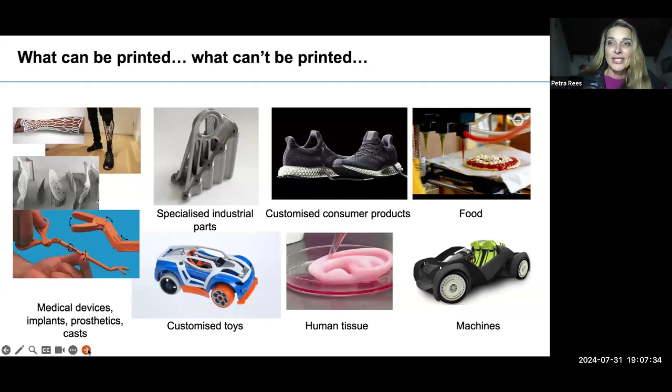So welcome to the world of 3D printing. It's really one of those things where anything you can imagine can be made - almost everything these days. You obviously need different types of technologies, and they're at different stages, but I'm going to get into it. It's really sky's the limit, that's what I'm trying to say with this.

Just a brief overview of the journey of 3D printing - I want to make sure this is all covered. I wanted to paint the picture of where we are with 3D printing and where we're going with it. It's actually a fairly old technology, speaking in terms of technologies - it really started in the early 80s, but it was patented for 20 years.

That's why we only really saw a lot of progress in the 2000s, once the IP was released in the 90s and then scaled. That's why you see a lot of things starting to happen around that time with prosthetics and prototypes - that's where it's still very prevalent.

We had the first 3D printed cars and houses in 2014. You probably remember this guy - since I've heard you also can speak to International Space Station people, I hope they're doing well now, stuck up there. But essentially, if you can see what he's holding, it's a wrench - they actually 3D printed a wrench. If you think about it, that's a decade ago, so it's a long time ago, yet it feels like we just heard about it the other day.

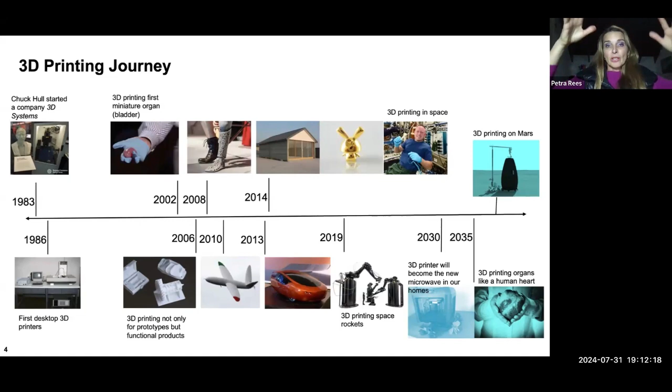It's going to be here before we know it. If you follow a little bit about the medical fraternity and what's happening there, it's just incredible progress every year. The pharmaceutical industry is already using 3D printing quite extensively. But yeah, we're still far away from having a 3D printer on your kitchen counter printing organs, though we are going to get there in our lifetimes for sure.

So that's just a bit of history. In terms of where the industry is at, I'd like to touch on that just to understand it a bit better.

You obviously know this guy called Gordon Moore. Back in the day he was talking about integrated circuits, and how every 18 months the technology, when it comes to scaling, doubles. So what we're trying to say here is that it is impossible to predict the future, but it is possible to understand the fundamentals.

Thinking about Moore's Law, we can actually translate it into an industry we all know really well, which is the music industry. If you think about where it started back in the day with a gramophone, and how it's progressed, it took a slower move until the 80s and 90s, and with MP3 music, it just changed our lives completely.

What you can see is really the exponential curve of what actually happened with this technology. Typically, if you look at any technology, it goes through this kind of curve, but it also goes through what we call the valley of despair. And that's a little bit where 3D printing also encountered itself to be in—I'll show you what I mean by that.

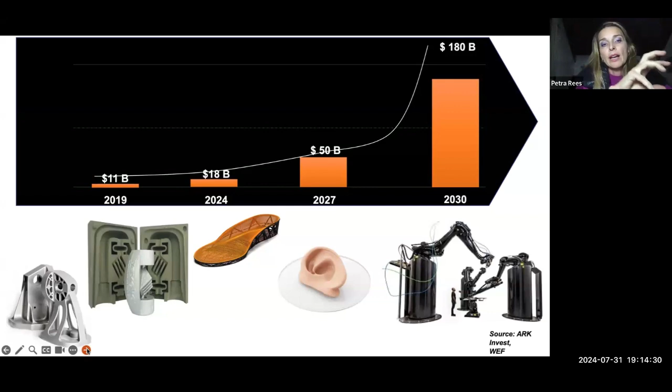When it comes to revenue and the markets, where we are at the moment and where we're going—today we're looking at this industry being $18 billion in terms of revenue. It's mainly moved from prototyping and making molds, very much in that engineering prototyping space, into end user products. That's really where it's taken a huge ride forward over the last years, because of that end user product focus and other industries I already mentioned, like space technology and robotics.

We can't think robotics without 3D printing. They are 3D printing a rocket to get to Mars so that it can 3D print a rocket to get back to Earth. So that's essentially what's happening.

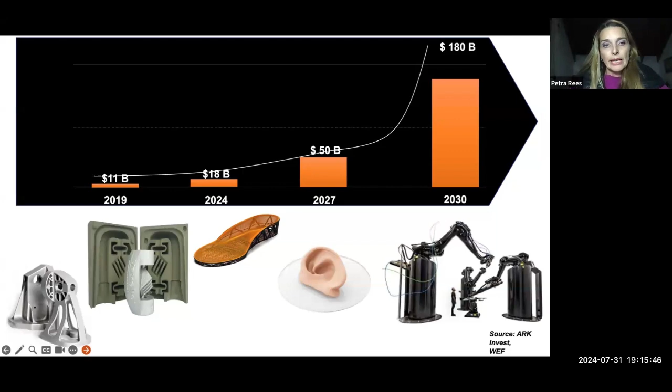We're predicting that by 2030, the industry should reach about $180 billion in revenue. So in the next six years, it's growing about 40% year on year, and we can already see the big jumps happening. That exponential curve I was alluding to in my previous slide—you can see the industry is following it as well. It's in its early stages but going to shoot up fairly quickly because of all these other elements happening, which I'll add to a bit more with these drivers in this slide.

So essentially, we have the technology drivers and the demand drivers. In terms of technology, we have to think about 3 things when it comes to 3D printing: the printers and the technology itself, the AI and software, the design, and the materials.

And the drivers in terms of what's driving these technology aspects is really time to market. Everybody is expecting things to happen really quickly these days. Think about molds, where before we needed casts and a really difficult way to CNC machine certain parts, and now you can 3D print them in a much faster time.

It's a game changer. Hyper customization is massive in a lot of industries, but mainly the automotive industry, with small batch manufacturing, organic manufacturing, and superior performance products. It links a lot to the automotive space. We can also see it in other industries like clothing and shoes. Everybody wants customization to fit their own bodies.

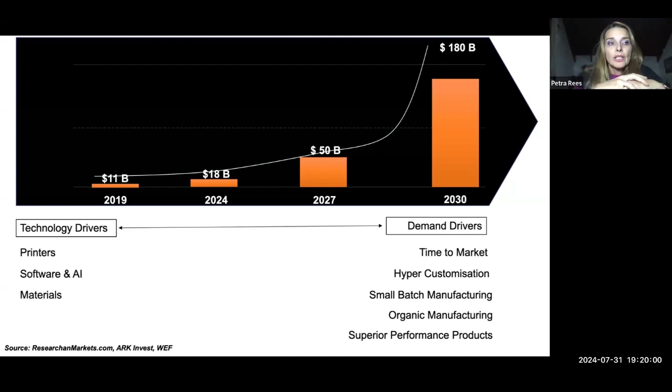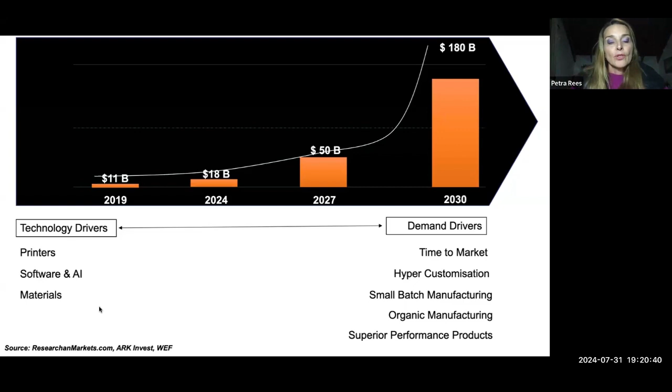Tesla does it all the time - they remove something like sometimes 10, sometimes even 100 pieces, and turn it into one, because they were able to design with the help of AI, taking into consideration materials and material science together with AI computing what's possible in the design world. You get incredible new organic designs that were never possible before. And you can't machine them, by the way - you can only 3D print it. So this is actually going to go even further.

I wanted to touch on why we haven't seen perhaps faster growth in this industry - this is typically what happens with a technology in its early stages. My prediction is that we're going to see the same with AI: you have a huge hype curve going up, everybody is crazy about this technology, everybody says it's going to change the world. Then you start seeing what we call the trough of disillusionment, where people say, you know what, it's not really what we had in mind - for all different reasons, because the technology isn't at the level people were hoping for.

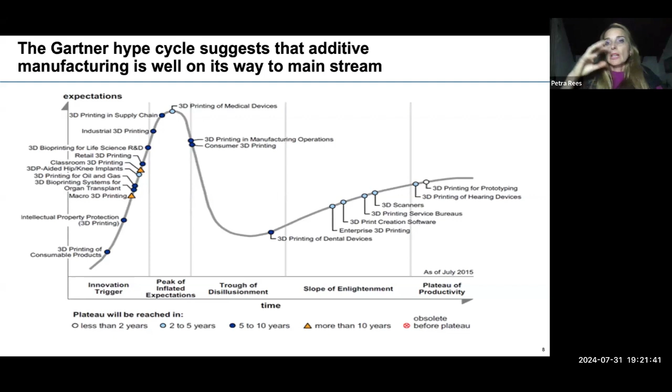Because obviously technology needs to evolve. You need different components, you get better components, better raw materials, etc. And then once you get through that dip, if I put it this way, you can start actually seeing the growth again. And that's really the exponential growth.

So what we've seen in 3D printing is that from the 2000s up until about 2014-15, it was going like this. Then we saw this dip. And now it's picking up again, thanks to COVID - I can actually say positively this time, because people realized the disruption in supply chains and invested more into this technology, and now it's actually scaling up again. You'll probably see the same happen with AI.

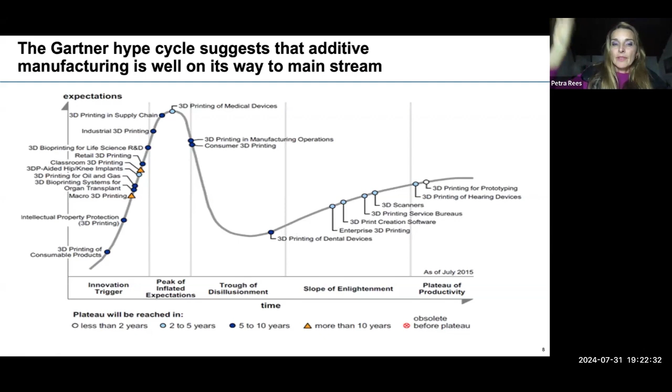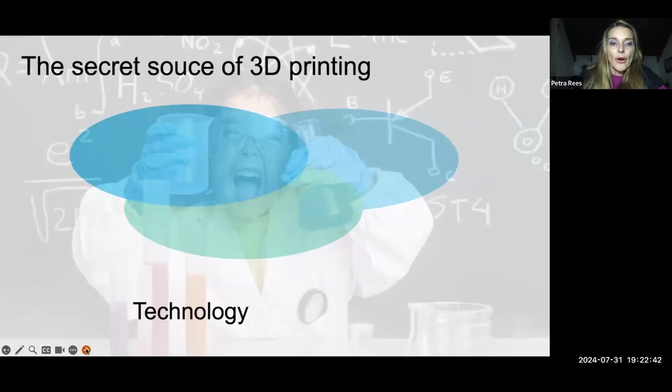So there will be that dip, everybody invests now, and then we will see that growth again, just FYI if anybody's interested. So I've already mentioned there's a prediction that by 2030 there should be a 3D printer in every home. The secret sauce is really about these three components: technology, materials, and design. They all go hand in hand, and one needs to understand all three to get the best out of 3D printing.

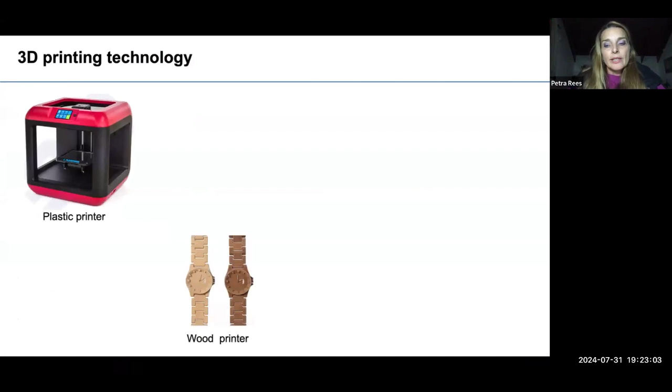The type of technology you probably came across - I call it the one that makes it easier for everyone - is a printer that prints plastic that you've probably seen before. It's FDM, fusion deposition modeling type of 3D printing. Then there's typically carbon fiber printers that some of you might have come across. The lucky ones are titanium printers, platinum printers - these are really in the labs of some of the big universities, as you can imagine, and CSIR. There's also a porcelain printer, wood printer, construction printer. I mean, that's just a taste of what's there. I just wanted to demonstrate the vast opportunities and industries where 3D printing is already happening.

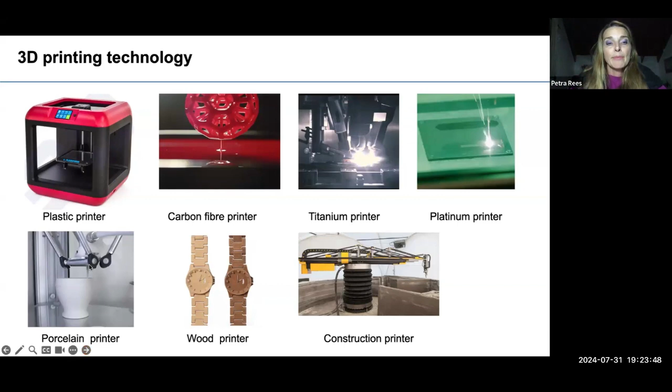The most popular technology for people like yourselves is really in the FDM space, as I mentioned, the fusion deposition modeling, which is that melting and creating those layers. Most popular printers for schools and homes - probably some of you may already have one.

The other type of printer is stereolithography, which is also very popular. What it does is use a UV laser beam to harden the resin to get the shape, also in layers. I'm going to unpack which ones to look at and start with.

The third most popular one that you should pay attention to is laser sintering. There's obviously others - much more in terms of 3D printing that's available - but for your interest and the space you're in, I'd suggest focusing your time on those printers because firstly, they're accessible. I doubt that somebody would just quickly tonight jump on a 10 million rand opportunity to get a 3D printer. So I'm just getting to the ones that I believe you should keep an eye on.

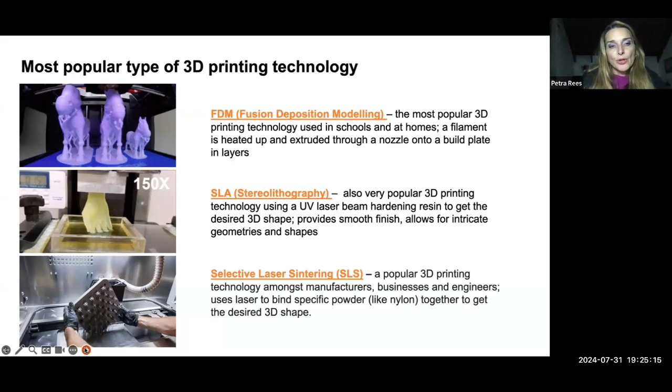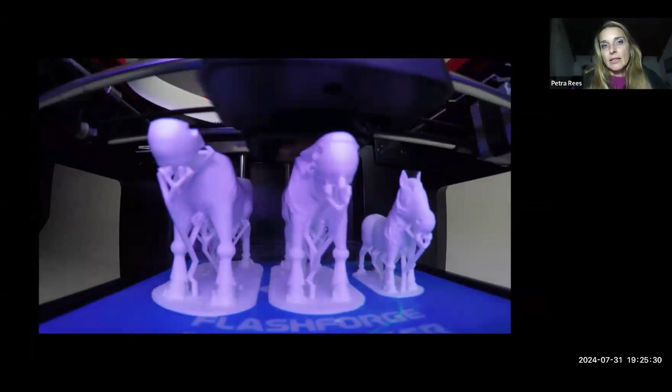And I'm going to also show - so this is the FDM printer. You can see this is obviously sped up, and you can see the layers being created by this printer. So this is your classic FDM printer.

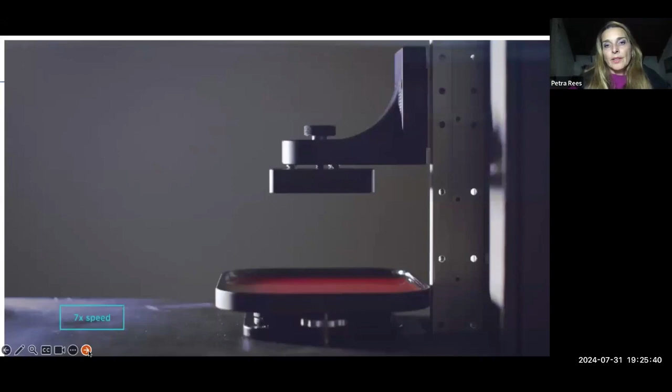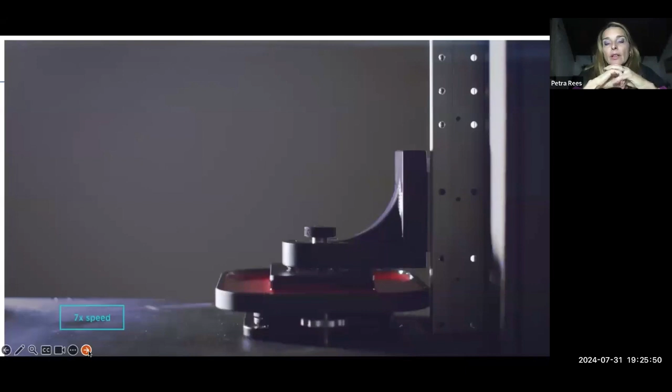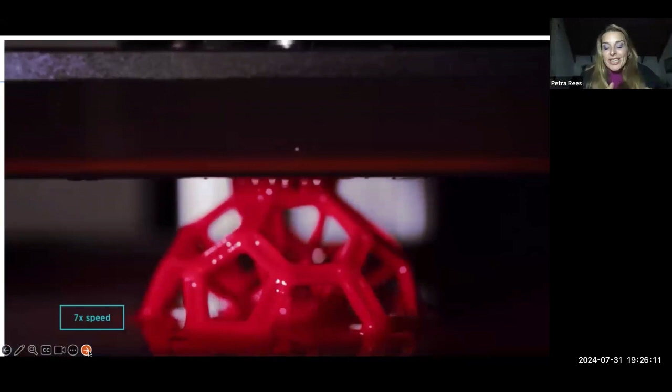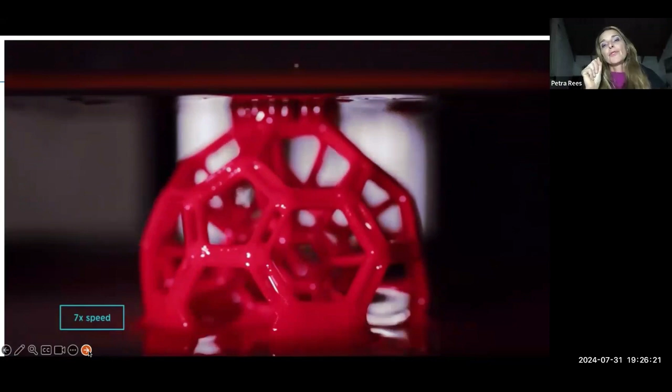This is your stereolithography. As I mentioned, that's the resin that is hardened by using UV light as well. So what happens is it creates those layers. It's a little bit harder to work with, just because I personally had one - I sold it because I wasn't necessarily the person who enjoyed the chemical reactions and the curing stations, and I ran out of patience, I'll be honest with you. My focus was not necessarily to have the absolutely perfect detail. This type of printing is brilliant, and you can see the quality and detail that you can get.

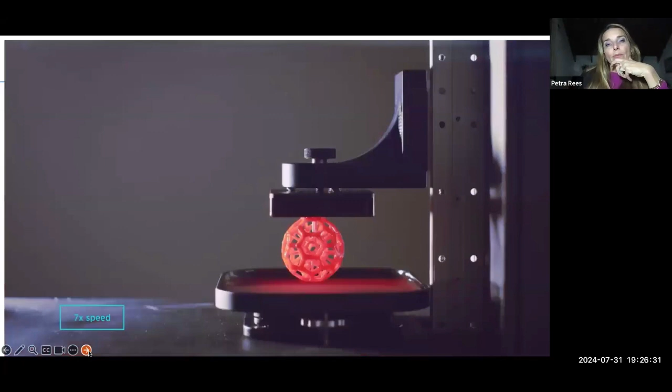Printers start from about 5,000 to 10,000 rand onwards, depending on the brand. So they are very accessible. By the way, the FDM printer - I have some more slides on that - you can get into it for 4,000 rand, but I'm going to get to it a little bit later.

This is... I don't know if you can hear, but even if you don't, that's fine.

So the first step of our additive manufacturing process is 3D design. Our designer will either create a new design from scratch or take an existing design and improve it, adding features that take advantage of 3D printing.

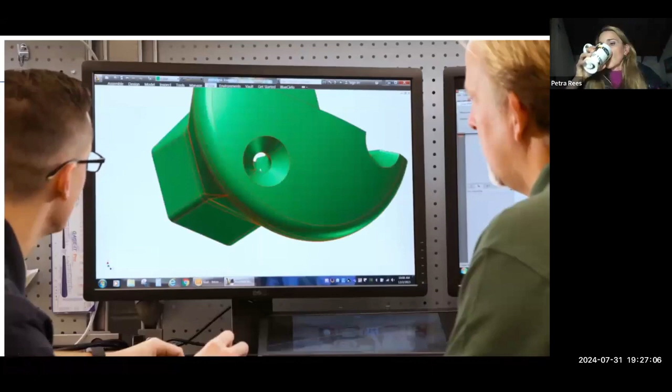We now have the capability of modeling our processes, so we can take these virtual designs and simulate our process in the computer to verify the designs will work as intended. Once we validate our 3D design, we start by printing it in plastic, a relatively quick and inexpensive process that gives us an actual 3D part versus a virtual design.

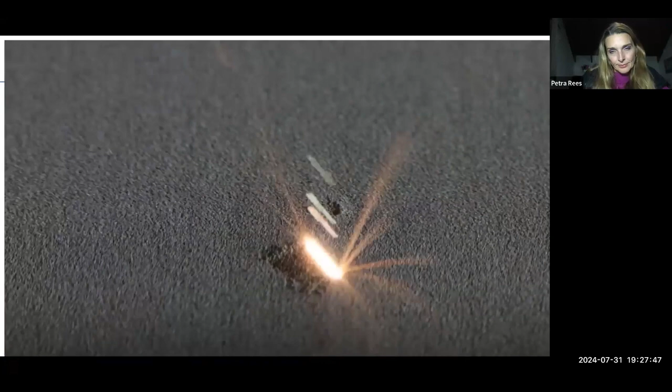We're in our additive manufacturing lab in Indianapolis, Indiana, next door to our powder facility where we make the atomized powders used in 3D printing. This printer has a 400-watt laser. A doctor blade carries the powder across the build plate, and the laser then selectively melts or sinters the particles together to form a solid part, building layer by layer.

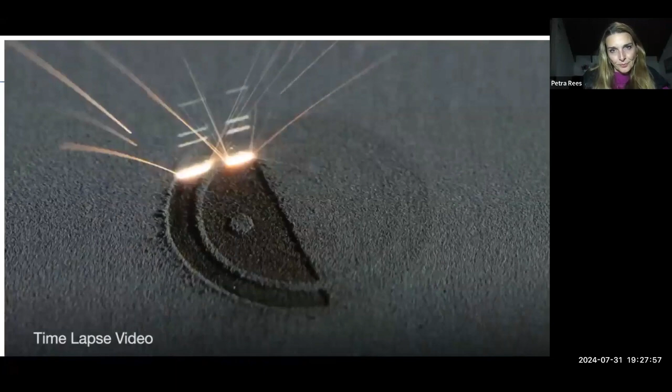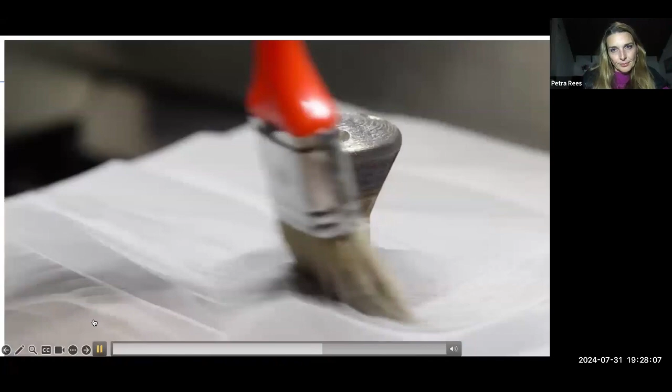A key advantage of additive manufacturing is the reduction in raw materials needed to process a part, because only the powder needed for the design is used. The remaining powder is captured, and working with our powder facility, we can recertify these powders as needed for different industries.

Once we have printed a part, either in plastic or more importantly in metal, we can scan the part and measure the dimensions to validate that we've met the criteria of our design. Additive manufacturing allows for complex parts that cannot be manufactured by traditional machining. This allows our customers to be very innovative, creating designs that weren't possible in the past, leading to improvements in efficiency, cost, and performance.

So if you're progressing on your 3D printing journey, this is something one would love to get to, where you can use laser sintering with metal powders. It is fairly expensive to get into, but the printers are getting cheaper and cheaper. The last time I looked at a relatively capable 3D printer like that, it was a few million rand, but as I mentioned, it's getting cheaper.

But what's important is that you can start getting samples like this - for example, this is a miniature of a manifold. As discussed in the video, you can start seeing how those parts would look, printing prototypes and studying them to see whether they have the relevant shapes and properties you require before investing in having it printed.

There are several 3D printing houses in South Africa. One of them, for example, is Mentors, which you might have come across before, where you can get parts printed on demand. They have a great nylon facility and great HP 3D printing machines, where you can get amazing parts printed in nylon that really last and have great properties. So it's one of those things where you don't necessarily need to own an expensive machine - you can still get it 3D printed with the right technology.

But I think the key is how do we get into 3D printing and use it in such a way that it can help you in your process in terms of what you want to achieve.

When it comes to materials, I'm going to stay in the realm of FDM, fused deposition modeling, the plastic printer you've seen earlier. I think it's one of the best printers to start with - suitable for what you want to do in the amateur radio space, because it gives you an opportunity to print some of the items you need without necessarily investing heavily in more complex machines. So I'm going to spend a bit of time on the materials you want to be working with when you have a 3D printer.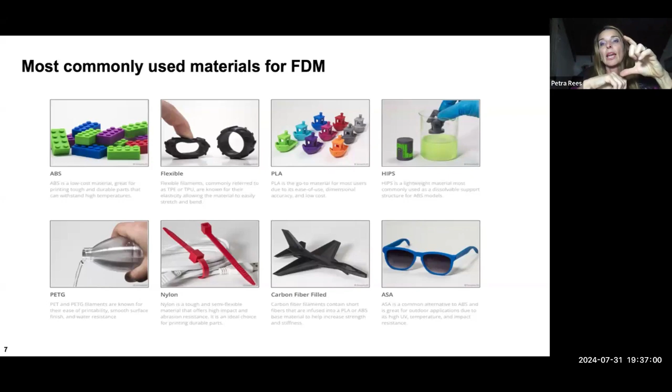And then there are others. The one I'd like to touch on is HIPS - it's really about dissolving. Let's say you print a part in ABS and other parts in HIPS, for example supports, then you put your component in the right liquid and it dissolves. The HIPS would then dissolve, and you have a perfect end product without machining it or spending a lot of time in post-production. That's another element you should be aware of if you want to print more complex parts.

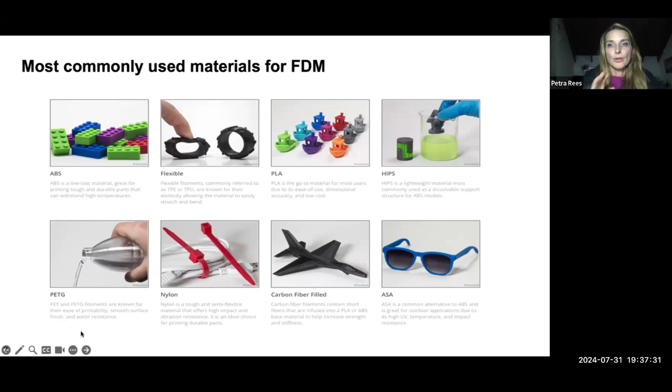So that's what I wanted to say about why complex parts matter. If you're looking at metal, or even trying to machine it, as I mentioned earlier, if you want to use ABS together with HIPS, you can start getting into an interesting area when it comes to design.

So whether you're using titanium parts and so forth, it can only be done through 3D printing and using the right software with it. That's why it's such an exciting space in the automotive industry.

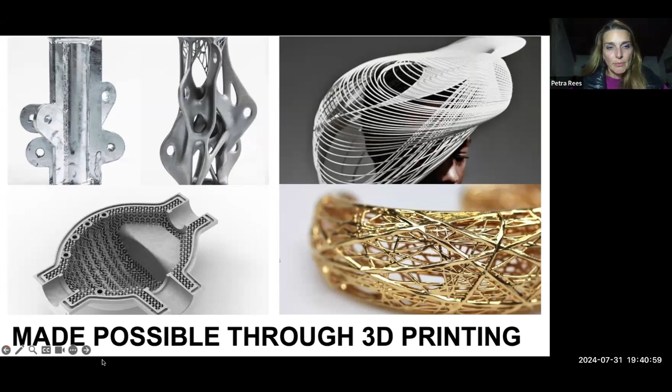When we talk about 3D printing in general, we also touch on different spaces. School is another area where you'll find 3D printing being used a lot, in robotics.

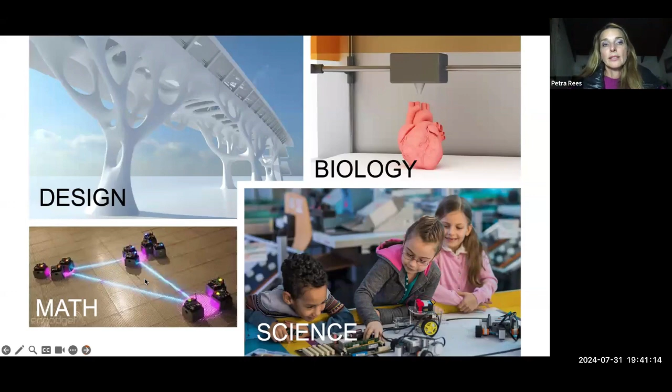As I mentioned, design, architecture - that space is growing like crazy because of construction and 3D printing in construction.

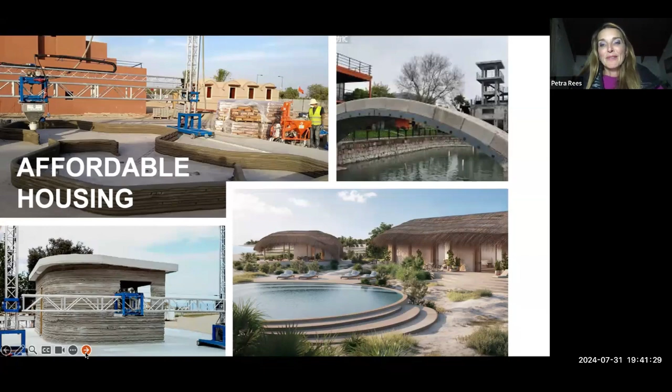I just wanted to touch on this because there's a lot of interest - often these questions are asked about how 3D printing in construction is going. So if you don't mind, I'll entertain you a bit on that.

I've chosen a few companies, the top 3 companies in the US and really in the world, and then one company that does 3D printing in Africa called 14 Trees.

What's interesting about them - these are the pictures 1, 2, 3. This first one, the house on top, is a 3D printed house by Icon.

This second one is the tallest Guinness Book record 3D printed house. It's actually an office, a municipality office in Dubai.

It's a 2-story building done by Apis Cor. And then you have SQ4D.

They're also one of the first to 3D print houses for sale with certified occupancy. The ones mainly in East Africa, Kenya, Malawi, are done by 14 Trees.

This is one of the examples of schools, as you can imagine, which is going to change mainly the local housing space.

There's a lot of debate about why we don't see more 3D printing in construction in South Africa. I'm not going to get into that, but there's a lot that goes with it, whether it's certification or time to market.

Things take time. People prefer different things. Awareness and education to move people away from the brick and mortar they know to a different type of material takes time.

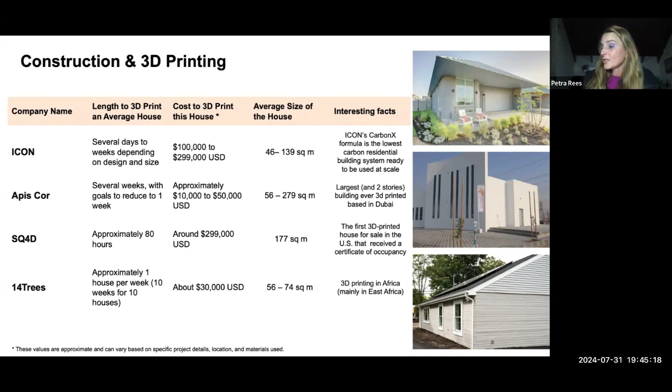From what I understand, in Dubai they want, by 2030, to have 25% of their houses 3D printed. Dubai's situation is slightly different because they're struggling with labor - it's hot in these spaces, so you really can't have people in 50 to 70 degrees Celsius too much on the construction side. So it's a big move in this space, especially in the Middle East.

Local supply chain - I already touched on this, it's again a big opportunity in that space. As I mentioned, you can repurpose things and get things to last longer. We had a great example of some items, like impellers, that lasted way longer than the original part. We were actually laughing with one of our engineering partners when the client was saying, 'you guys need to make it in such a way that it actually breaks, otherwise you will never make money.' So we were really having a good laugh.

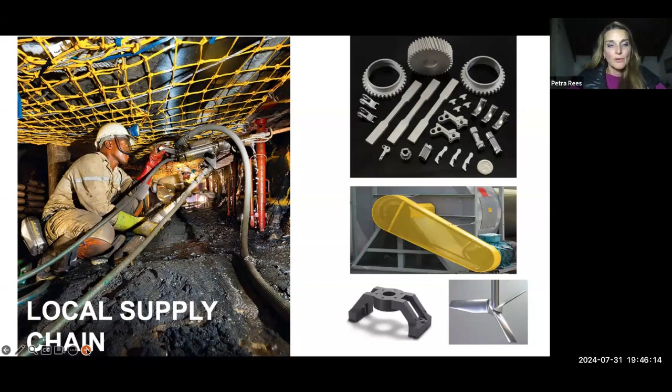In terms of time, I don't want to get into every little detail, but local innovation is just a touch on this. You'd know this kind of tractor that you might have seen, not just in South Africa but anywhere in Africa - you can repurpose things. What I'm trying to say is, thanks to 3D printing, you can get these machines to push their lifespan and go a little bit longer.

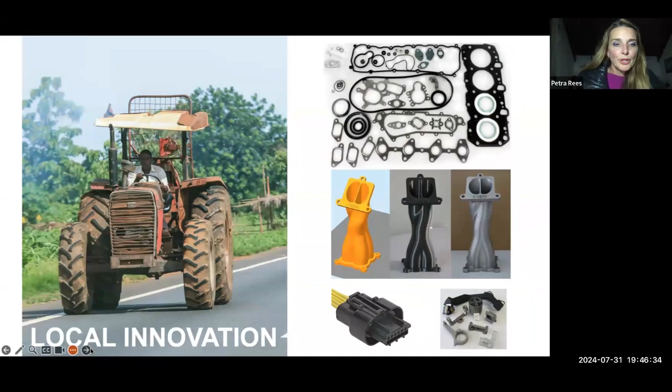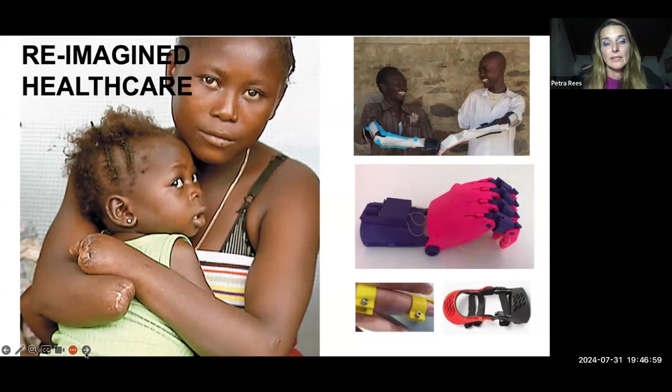Healthcare is massive, they're already 3D printing - obviously upper arm prosthetics. We 3D printed on our small printer, one just for the school environment, this hand. From a cost point of view, it was 200 Rand, and it took a day and a half. So what's happening in this space is, again, we're at the precipice of what's possible.

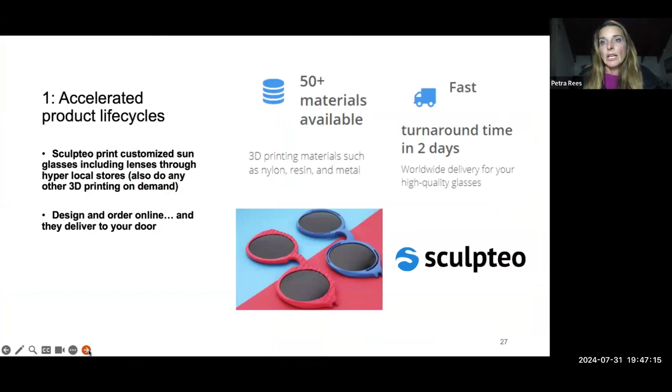Just the five big disruptors, I'm going to touch on them quickly. So it's accelerated product life cycles - as I mentioned, people want things tomorrow, so you can decrease the turnaround time. You can get new manufacturing strategies and footprint.

This is, for example, one of the 3D printed cars. I imagine you can have a model that can be 3D printed anywhere - you can design it in Johannesburg or anywhere else in South Africa, and then somebody in Malawi can 3D print it, having the machine.

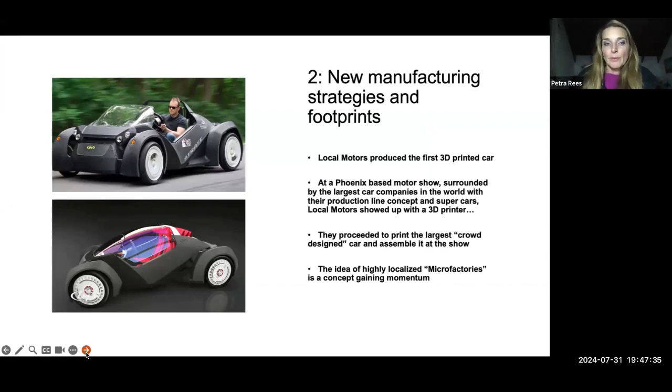Shifting sources of profits - this is the shoes we're talking about. Adidas, for example, the customized ones - when they started, they had 5,000 shoes, which is commercially not possible to make through traditional manufacturing in order to make any money, with the right molds and all of these things. But with 3D printing, you can. That has its limitation at the same time, because the units are much smaller, on a much smaller scale, but that's why the customization actually works as well.

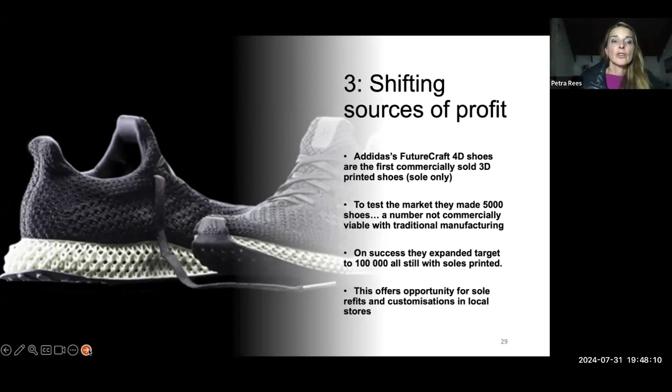So it's an upside and a downside. New capabilities I already mentioned, for example, medical space, latest design.

CAT wants to 3D print 10% of their parts by 2025. I think they're a little bit further than that. It's happening in the basements in America, but I think there's a lot for that.

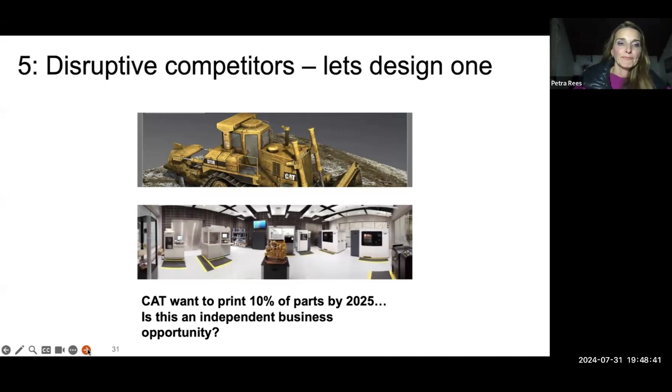So this is where I'd like to get a little bit more practical. I pulled out a few images that probably look familiar to you. Some of them I didn't know what they were, I won't lie. But I know you would probably smile when you see them.

These are all free models available online today that you can 3D print if you have a printer. There are some others, these are different knobs. I think I 3D printed this one, can't remember which one it was.

Casings, all of these things you can think about. A lot of these are free. There are some that might be at a cost, but as you can see, 12 Rand, if you really want that specific knob, it's not bad.

So it's really the cost of design that's expensive, but because of people like you who are enthusiastic about stuff and want to share, a lot of people design things and put them online, and you'll typically find them on things like Thingiverse and MyMiniFactory, where all these designs are already for free.

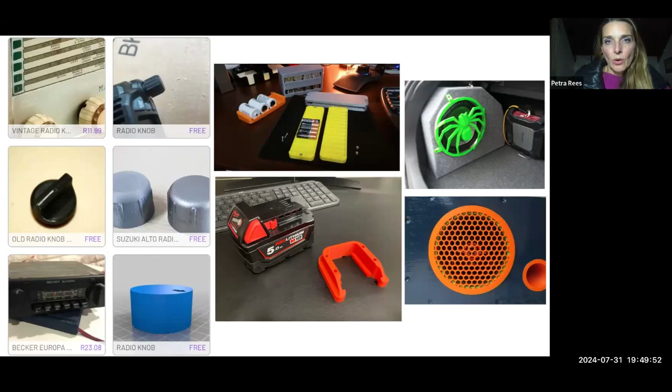The printers. When people ask me where do you start, the one in South Africa that you've probably come across, and somebody on this call might already own it, is the Creality Ender. People say, do you have an Ender? It's a great entry-level 3D printer. You're probably looking at 4,000 odd Rand to get into the space.

It really does its trick. It prints with PLA, as I mentioned. For anyone who wants to start, it's a 4,000 Rand investment, but you can get into the game and understand starting printing with PLA, and all of these items you saw here, you can 3D print. However, that's the challenge, if you now want to print items that will be outside in the garden, if I start thinking about antennas or casings, I'd like something that won't warp.

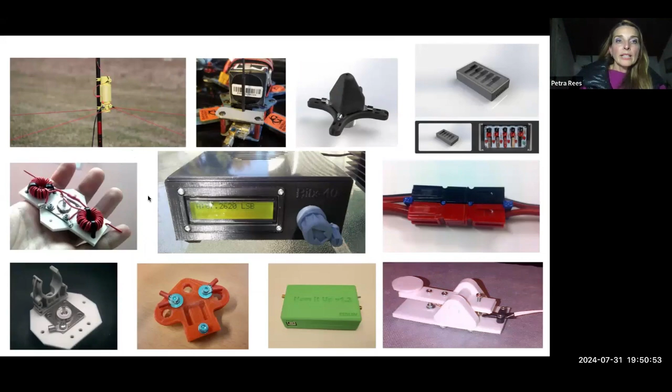So then I need to start printing with PETG. With a Creality, you'll be pushing it if you want to use PETG because of its properties. PETG melts at a high temperature. It's really ideal between about 260 to 280 degrees.

So you need the right nozzle, essentially, that can heat up with the extruder to reach that temperature. And then you want the bed, where it prints, to also reach a certain temperature. PETG likes it at about 70, 80 degrees, and you'll be pushing it with this printer to get there. If it doesn't stick on the bed, it won't print, it'll just become loose and never make it.

So I put together a few other options you can look at, where you can start printing with PETG, and some resin printers currently in the market. Creality also has more advanced printers, not just the Ender at 4,000 Rand, and those printers are starting to move up. You're looking at doubling it, so from 8,000 Rand you essentially get access to a much better quality printer where you can start printing with PETG and leave it outside.

I mean, when we start talking about door handles, markers, I've got all sorts of stuff here. When you start being in that space, you're kind of looking at that.